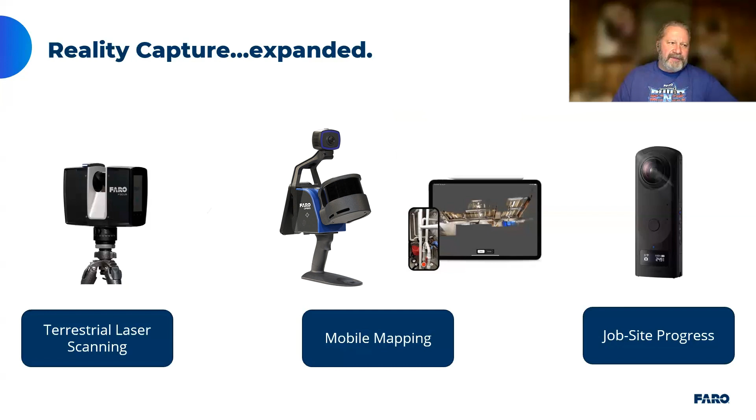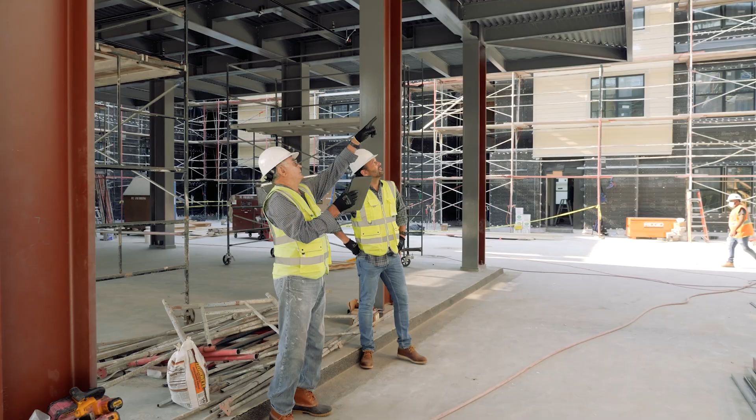I did a podcast webinar and I called it the 'shuns', T-I-O-N, shun. Because if you look at what we're talking about, which is construction, everything seems to end with T-I-O-N. It's all about adoption, implementation, education, collection, consumption. All this revolves around the construction space.

And one of those 'shuns' I talked about was the concept of democratization - the ability to make the data accessible and easily understood. So Sphere XG, for example, is a democratization visualization platform.

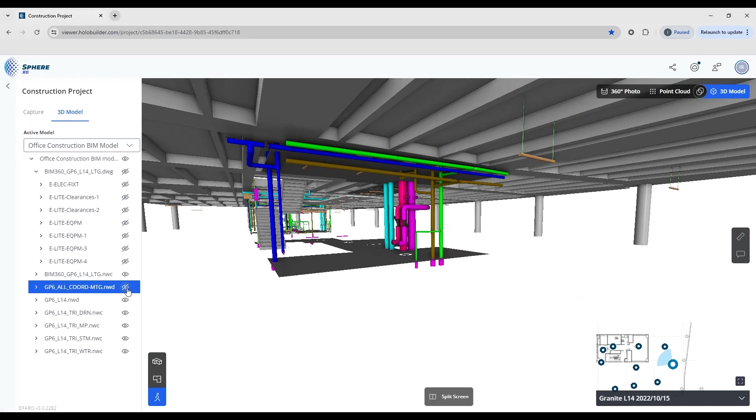That's what it is. It allows me to take 360 photos, it allows me to take my BIM model or 3D model, because they're two different things. It also allows me to bring in my LiDAR point cloud data and see it all together in a singular platform, which traditionally, up until recently, was done in a very siloed format.

I would literally have three windows open - I'd have my 360 photos over here, and I'd try to orientate myself within my BIM model manually, and then try to orientate that within my point cloud manually, unless I brought my point cloud into my AutoCAD. You'd find yourself working through this multi-siloed, faceted world.

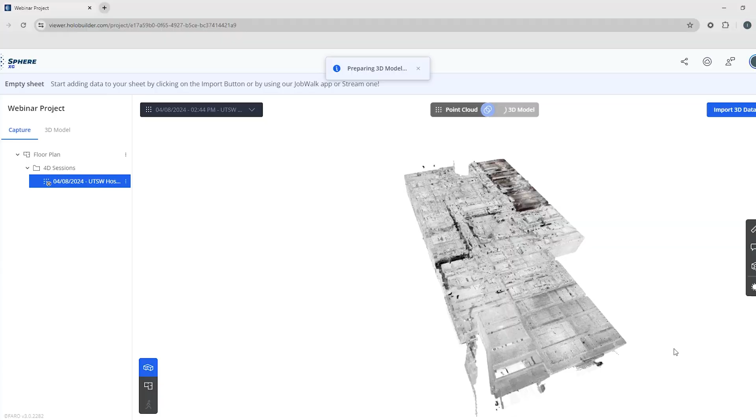Sphere XG bridges that gap by creating a tool that allows me to democratize the data, make it easily accessible, and make it easily understood, because I have all the data in the same space at the same time, and can even time reference backwards and say, well, this is what my scan looks like today, but here, let me show you what the photo looked like two weeks ago or three weeks ago.

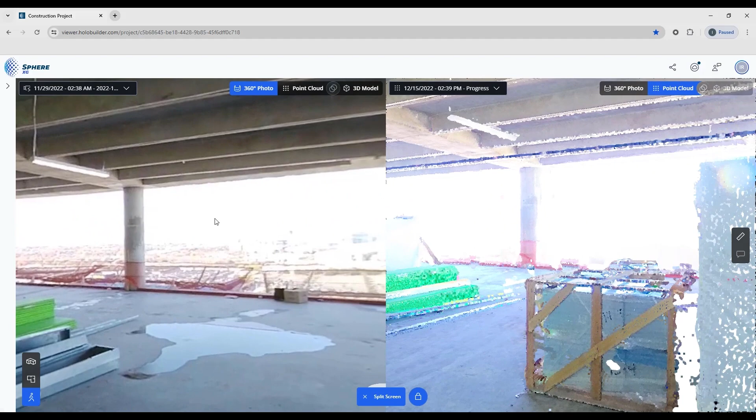Now I can see some progress. I can see more anomalies that begin to populate based upon the ever-flowing environment of construction. That democratization tool allows us to work together collaboratively in a more open and honest environment.

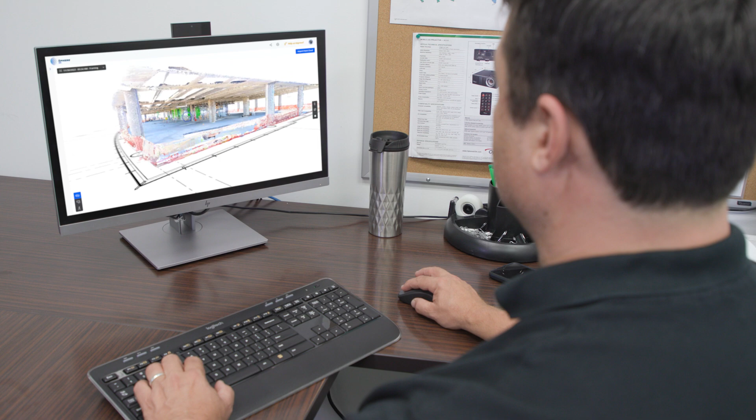Capturing data without the ability to share it means that I'm the only person using that data. The ability to democratize data ensures that everybody has access to the data throughout the entire project, and all the stakeholders benefit.